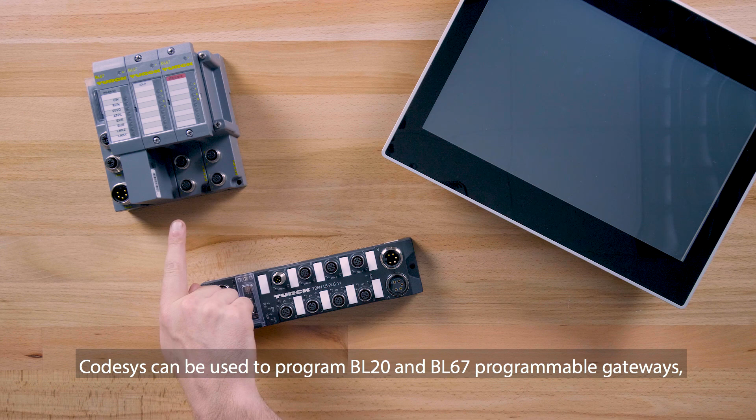Codesys is a controller development system. The flexibility and powerful tools of this software have been a game changer in controller applications. Codesys can be used to program BL20 and BL67 programmable gateways, TX HMIs, and IP67 TBEN PLC blocks.

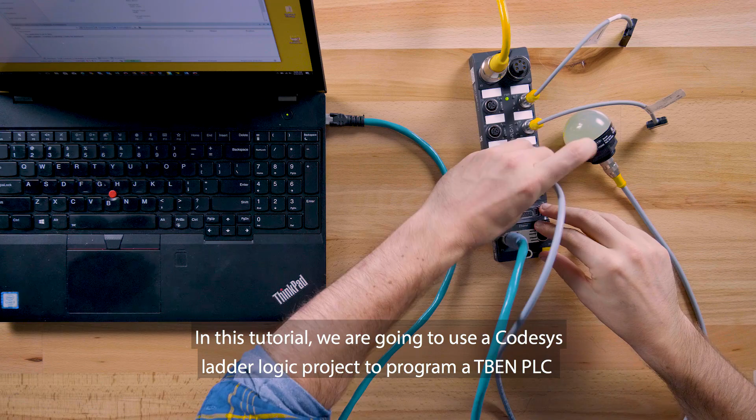In this tutorial, we are going to use a Codesys ladder logic project to program a TBEN PLC to count 5 cans and then turn on an indicator light. We will also have the ability to reset the counter by activating another sensor.

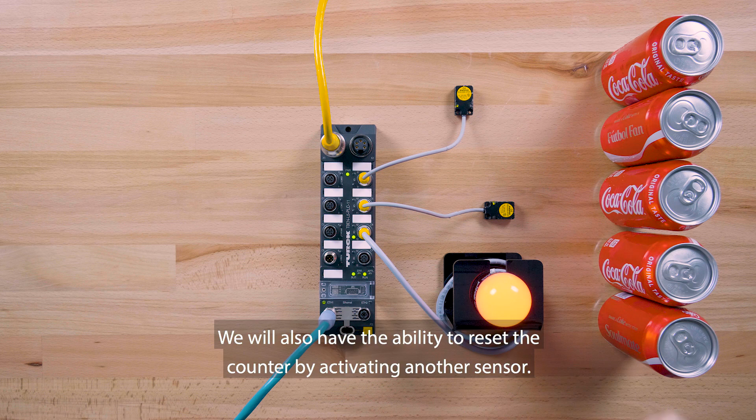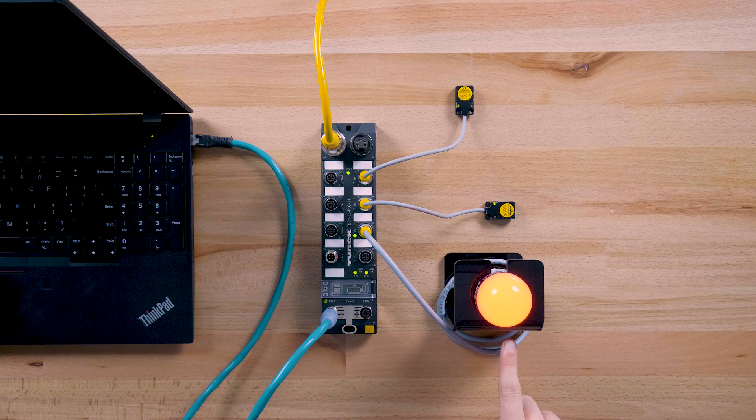You will need a TBEN PLC, a 24-volt DC power supply cord set, an Ethernet cord set, 2 capacitive sensors to detect the cans and to reset the counter, an indicator output light, and a laptop or PC.

First, let's download and install Turck Software Manager by going to www.turck.com/tsm. With Turck Software Manager opened, click the plus symbol next to Fieldbus Technology and click the selection box next to DTM for Fieldbus I/O systems.

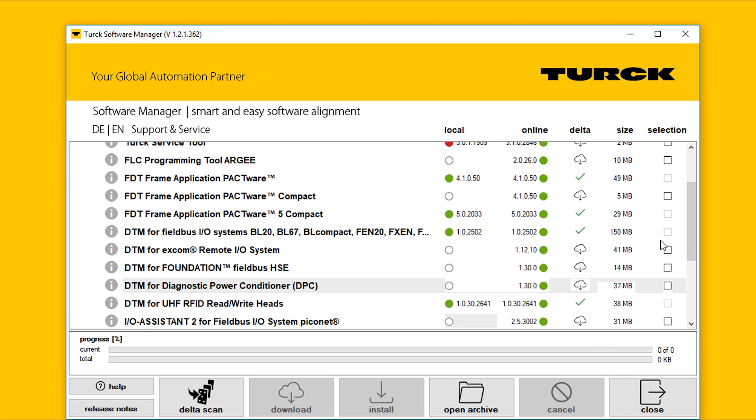Then, click the plus symbol next to Control and HMI. Here's where we download Codesys and all the necessary package files. In this example, we are going to use Codesys 3.5 Service Pack 8, so we will check the selection box next to it. We will be using the TBEN PLC block, so we will also download the Codesys TSP for the TBEN PLC. First, follow the prompts to download and install Codesys.

With Codesys downloaded and installed, open Codesys. Select Tools and open Package Manager. With Package Manager opened, select Install. Then go to where the package file was extracted to and select it.

The Choose Setup Type box will then pop up. Click Next, then click Next again. Once the setup is complete, click Next, then Finish. The Codesys package for the TBEN PLC should now be seen in the Package Manager screen.

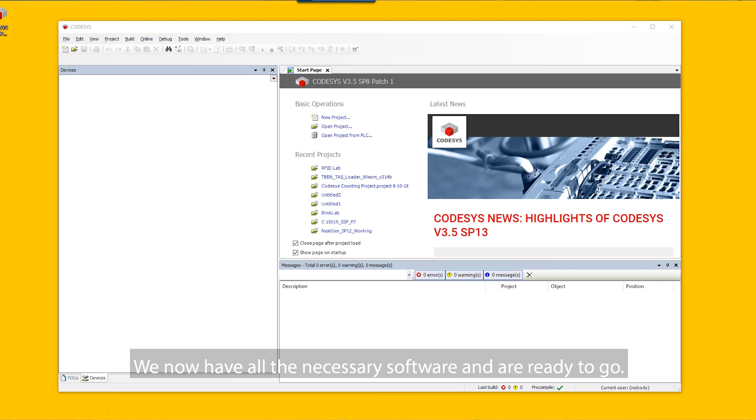We now have all the necessary software and are ready to go. Plug the 2 sensors into port 4 and port 5. Then, with an M12 cord set, plug the light into port 6.

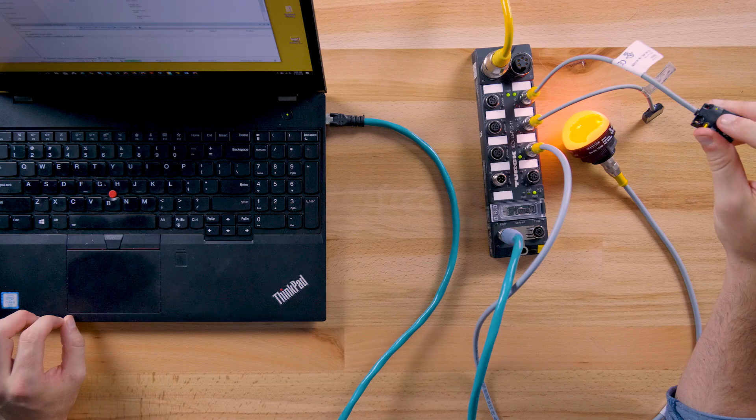Next, connect the TBEN PLC to a 24-volt DC power supply cable. You will notice the LEDs in the block will light up. The next step is to connect the TBEN PLC to your PC using an Ethernet cord set.

We first need to configure the Ethernet port on your PC. You can do this by going to Control Panel on your PC and then accessing Network and Sharing Center. Click on the local area connection your block is connected to and click Properties.

In the Local Area Connection Properties window, click on Internet Protocol version 4 and then select Properties. Ensure the IP address is within the 192.168.1 subnet.

Let's now open Codesys. First, click File, and then click New Project. In the pop-up window, select Standard Project. Provide a project name, and then select OK.

In the Standard Project pop-up window, in the Device drop-down, select the TBEN-L5-PLC-11. We will also select Ladder Logic Program in the PLC Program Type drop-down menu. Then, click the OK button. The configuration will show up on the left under Devices.

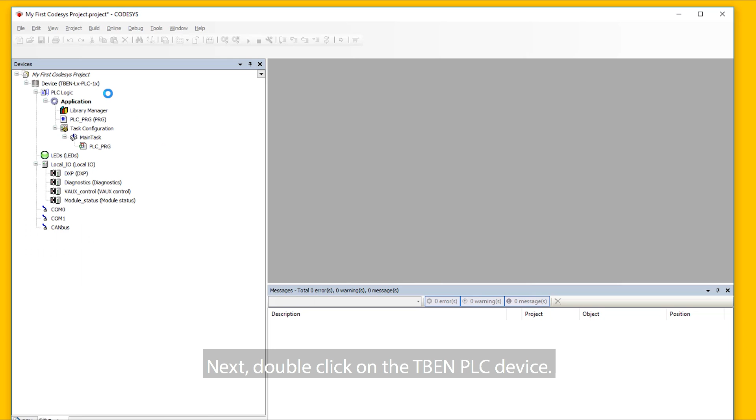Next, double-click on the TBEN PLC device. This will bring up the communication settings. In the Gateway drop-down menu, select the gateway the TBEN PLC is connected to, and then select Scan Network. This will find the Turck device you have connected.

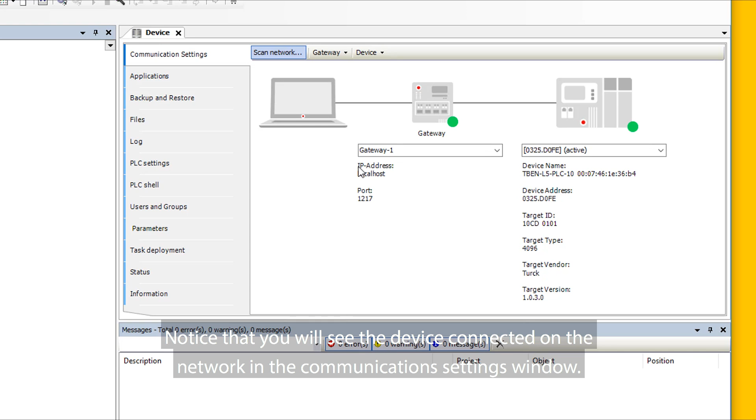Click on the device and select OK. Notice that you will see the device connected on the network in the Communication Settings window. This is indicated by green indicators on the gateway and on the TBEN PLC device. We are connected. Next, under Local I/O, double-click on DXP.

Then, click on DXP I/O Mapping. This is where we assign tag names to the I/O. Remember, we have the sensor counting cans plugged in on channel 8, the reset sensor is plugged in on channel 10, and the indicator light is plugged in on channel 13.

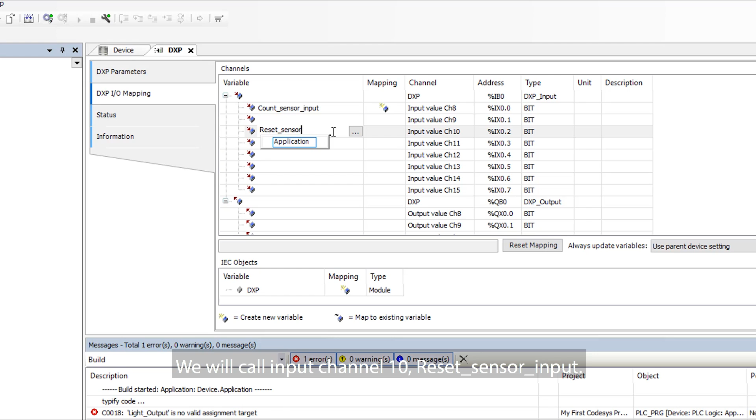Under Variable, we will call input channel 8 Count Sensor Input. We will call input channel 10 Reset Sensor Input. Lastly, we will call output channel 13 Light Output.

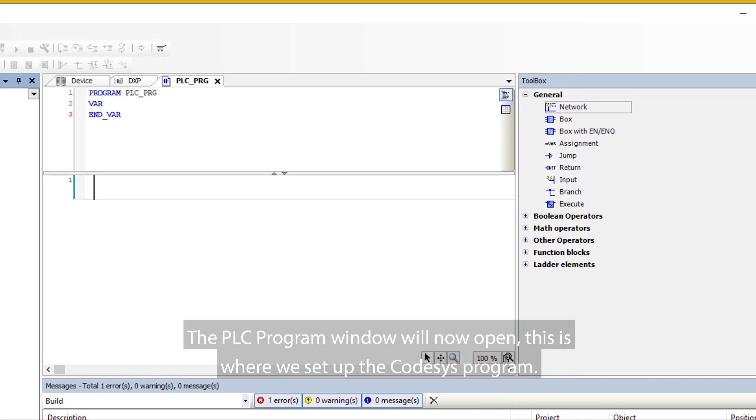With the names assigned, double-click on PLC PROG. The PLC program window will now open. This is where we set up the Codesys program. You will notice on the right there's a toolbox.

Click the plus symbol next to function blocks and drag the CTU counter function into the workspace by placing it on the Start Here indicator.

First, let's give this function block a title. In this case, let's call it My First Counter.

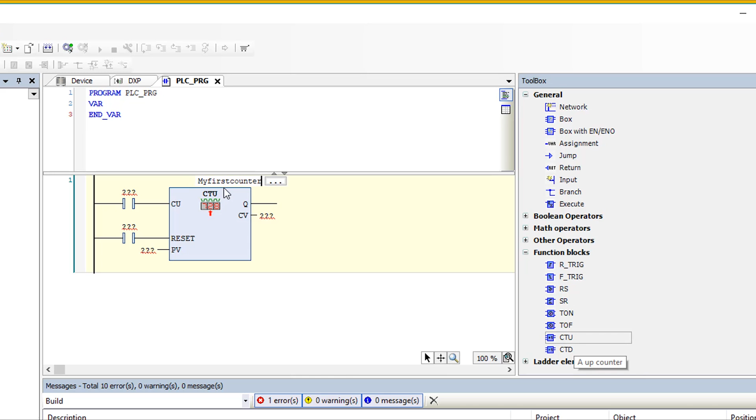In Codesys, these two symbols here are called contacts and they represent our inputs. To assign variables, click on the question marks and click on the box with 3 dots. The Input Assistant window will open.

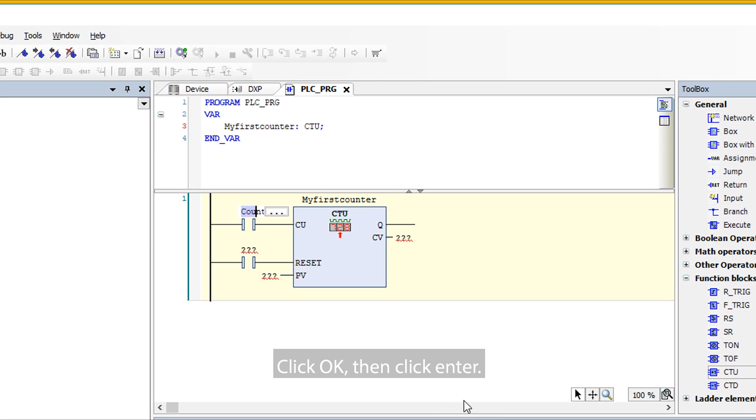Click on the plus symbol next to IO Config Globals Mapping. Then, click the recently created Count Sensor Input. Click OK, then click Enter. Next, we are going to set our Reset Sensor Input using the same method and selecting Reset Sensor Input.

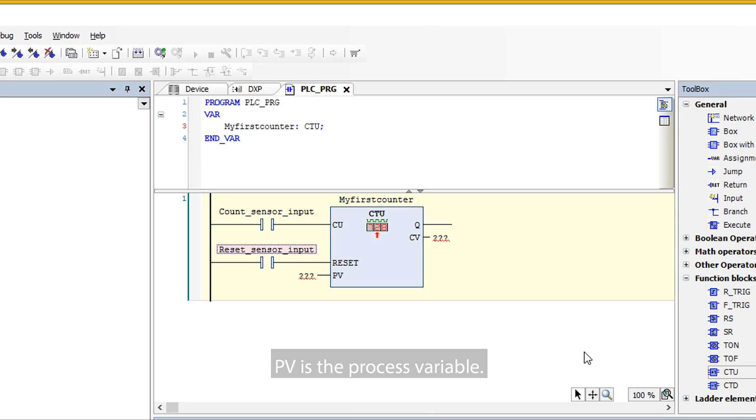PV is the process variable. The count input sensor is going to count to 5 before turning on the light, so we are going to type in 5 and click Enter.

On the right side of the function block, we are going to have our output. Right-click here and select Insert Coil. In Codesys, coils are our outputs.

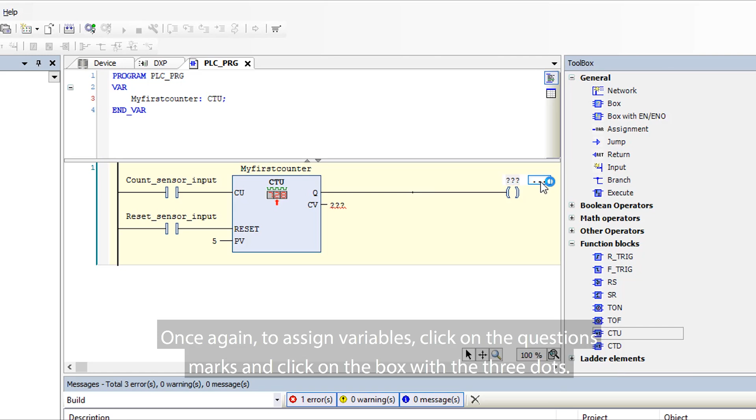Once again, to assign variables, click on the question marks and click on the box with the 3 dots. Click on the plus symbol next to IO Config Globals Mapping. Then, click the recently created light output. Click OK, then click Enter.

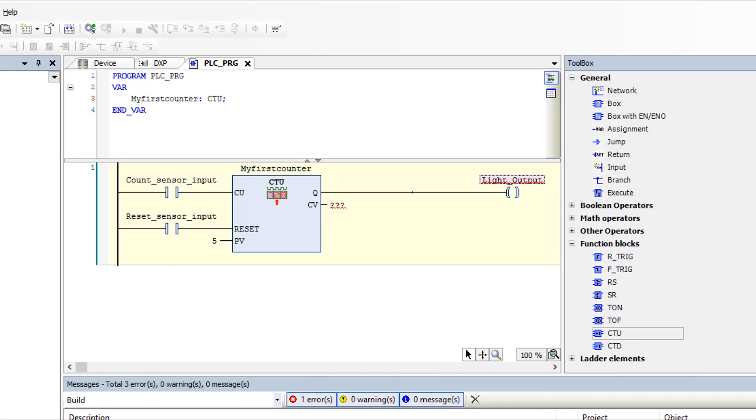CV is our current value. Let's make this a tag for future monitoring. Let's name this Current Value. Click Enter, and then click OK in the pop-up window to declare the variable as a word.

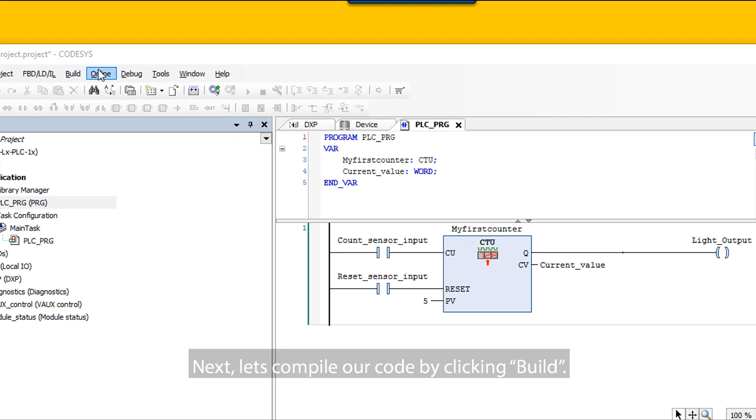Next, let's compile our code by clicking Build. This way, we can check to see if there are any errors. As you can see, no errors are found.

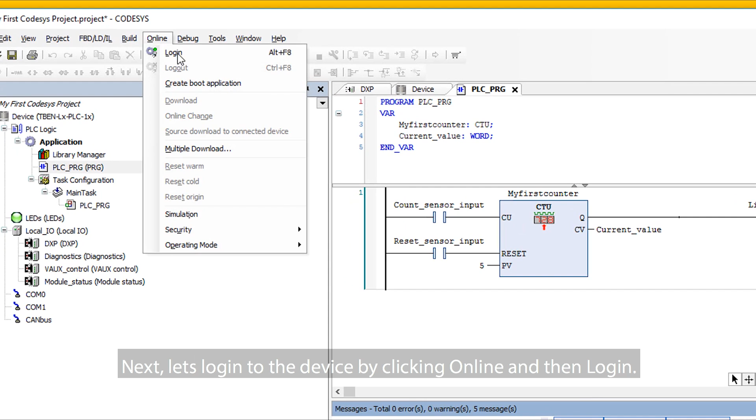Next, let's log into the device by clicking Online and then Log In. To run the program, click the Play button at the top of the Codesys screen. We are all set. Let's test the program.

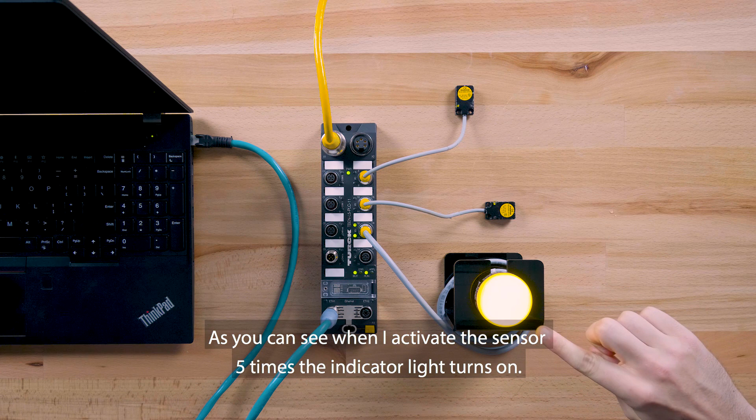As you can see, when I activate the sensor 5 times, the indicator light turns on. The second sensor resets the counter and resets the light. You can also see in the Codesys program when the sensors and lights are activated and the current counter value.